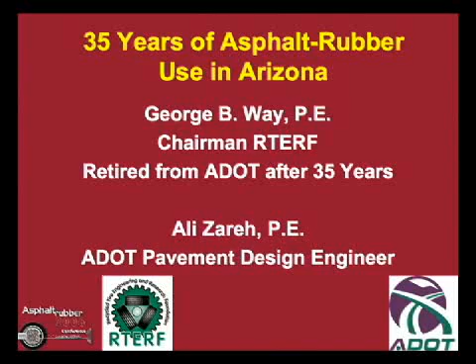Thank you all. Yes, indeed, I do have all those years of experience, and I also have an excellent plastic surgeon, by the way, who spends a lot of time on me.

I'd like to recognize my co-author, Ali Zareh. Ali, please stand up. He's with the Arizona Department of Transportation and provided a lot of the background material you see here. I was previously with the Arizona Department of Transportation for about 35 years, and it's a great state. Maybe not quite as great as California because we don't have an ocean, but who knows? Stay tuned. You never can tell.

I wanted to make a little comment about this morning's presentation. My good friend and partner, George Souza, talked about his four very beautiful assistants, Katia, Carla, Susanna, and Rosanna. Boy, those are nice names, aren't they? But I want to mention that they are all engineers, all civil engineers, and I know they're very good at their job. So I thought it would be nice to recognize them. I don't know if they're in the audience or not, because it's not an easy thing for a woman to be an engineer. It's not easy for a man to be an engineer, to be perfectly honest, but whether they're here or not, I think you should give them a little applause, because I think that's quite a great accomplishment.

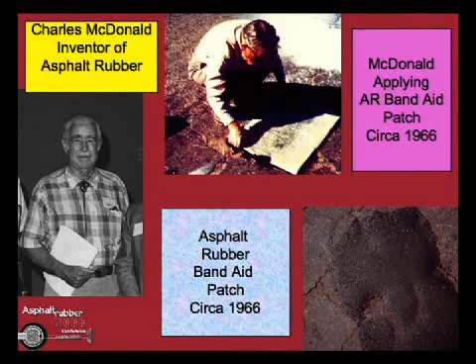You've already heard a lot about this man, Charles McDonald, and I had the good pleasure of knowing Charlie. He's long gone now, too bad. He was a real pioneer, a real true pioneer. And it's true, he did develop this material just to fix up the roadways in the Phoenix area, just temporarily. Back in those days, middle 60s, roads in Phoenix were really not in too good a shape. And thanks to him, a lot of roads in Arizona are in very good shape today. So sometimes one person can make a difference.

Oftentimes nowadays we do things by committees. We have to have 47 committees do everything, but sometimes it just takes one person to make a big change in the world. And I applaud Charlie McDonald for doing that and having the perseverance and personality to do it as well. Charlie always had a smile on his face. He was always in a good mood. Even when people were asking him lots of questions and saying things couldn't work, it didn't seem to bother him.

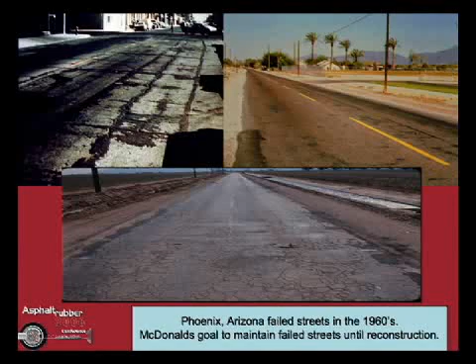He seemed to believe they would work in the long run, and sometimes that's what you have to have. You have to have that knowledge in your own mind that something is going to work and just keep on going. And that's the way my colleague George Souza is. George doesn't smile as much as Charlie did, but I tell you, he does have that enthusiasm to get things done and to keep going. He doesn't give up. He didn't give up on this conference, and I know for a fact he could have given up many, many times, but he didn't. So, like I say, just one person can make quite a difference in the world.

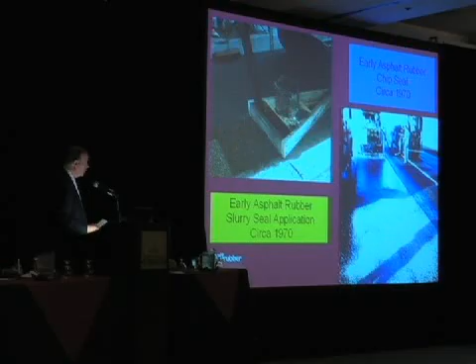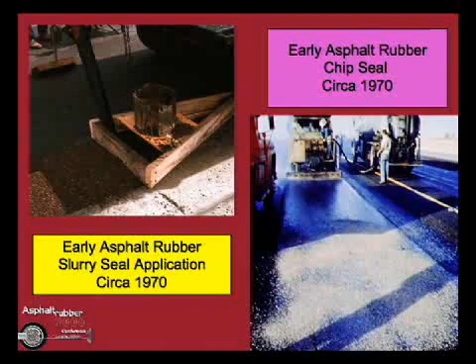In the early days, things were pretty primitive. Equipment was very primitive. It was kind of like, make it in your backyard and see what happens. And there were a lot of failures, a few successes, but a lot of failures in the early going. Eventually, they got better at what they were doing, not a lot better, but a little better. And even though in those days they did a lot of manual labor as far as getting the rubber into the trucks in order to spray the rubber, nevertheless, it was progress, and again, some good things happened along the way. So what happened along the way?

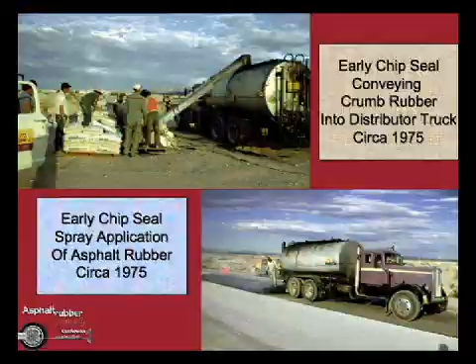Well, for one thing, they came up with a seal coat process, which was called a SAM, stress-absorbing membrane. And the thing about asphalt rubber is because of its high viscosity at high temperature, you can put down a very thick layer of this material before you put the chips down. And we found that would prevent the reflective cracks very well.

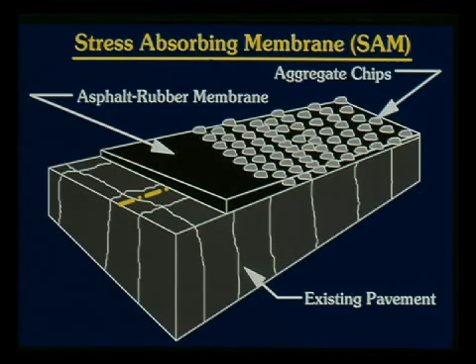This was the first really practical application of this material, and it came about in the early 1970s. To get to this point, they had to burn up a few dump trucks along the way, but they eventually got to it. Then later, through additional research, they found that an interlayer, a stress-absorbing membrane interlayer, would also work very well.

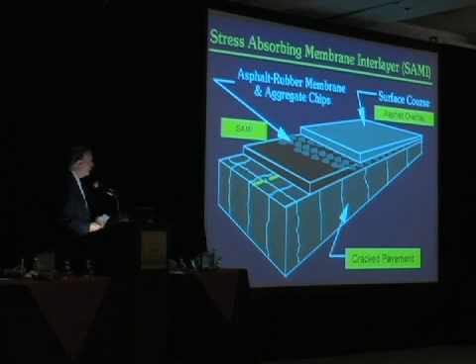Many of the early projects in Arizona were this type of construction. They were a 2-phase type construction: place a seal coat, and then place an overlay on top of it. This is still a very good process. It's not terribly popular in Arizona today, primarily because we'd like to do everything in one process. We'd like to avoid having to do things twice, simply because we have a lot of traffic in Arizona, just like you have an enormous amount of traffic in California.

For those of you who hadn't noticed, drive around California for a while and you'll notice—I used to say everybody in California owned 2 cars and they drove them at exactly the same time, which is really amazing, but I think it's true. There's a lot of vehicles. The only place I found more vehicles than California is China. And that's an amazing place, too. I know George eventually will talk about that.

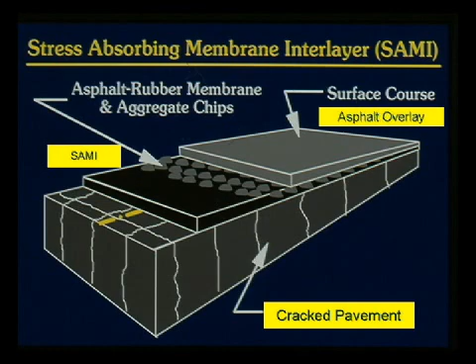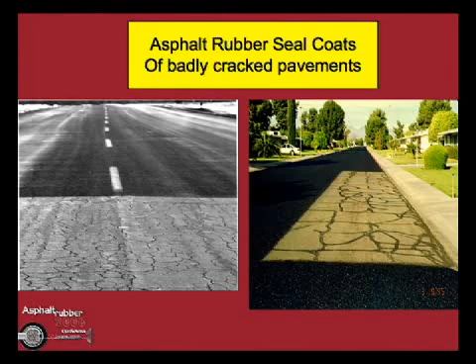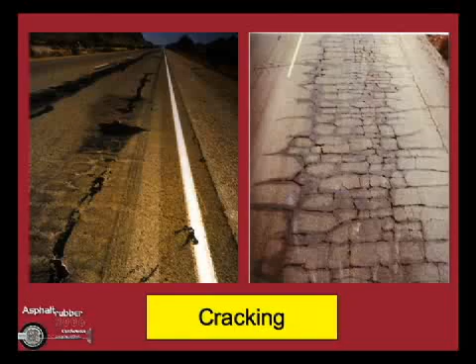Some of the early seal coat jobs were focused on really, really badly cracked highways. They were seal coating them as a temporary action, only to last a year or two until they got around to overlaying them. The way funding went in Arizona, sometimes that would take more like 5, 6, 8, or 10 years. So we learned a lot from these early seal coat jobs about the ability of asphalt rubber to retard reflective cracking. Cracking, indeed, is why this material was eventually adopted in Arizona—to prevent reflective cracks. In other words, when you overlaid a pavement of this bad a nature, you could prevent the cracks, or at least delay them for a very long time from coming through.

Raveling is another issue. Fortunately, we don't see much of this in Arizona anymore, but many years ago the Federal Highway Administration, wisely I think, promoted the use of open graded friction courses as a means of getting safer highways. A lot of states tried this; Arizona and California had used them for many years. But one of the problems with open graded friction courses is that they do tend to ravel. The reason for that is because you can't really put too much asphalt into an open graded friction course—at least not if you use regular asphalt, because it all runs off and then you have a bleeding situation. So you're always between either raveling or bleeding. You'll see later that the adoption of asphalt rubber for open graded friction courses has really prevented this from occurring.

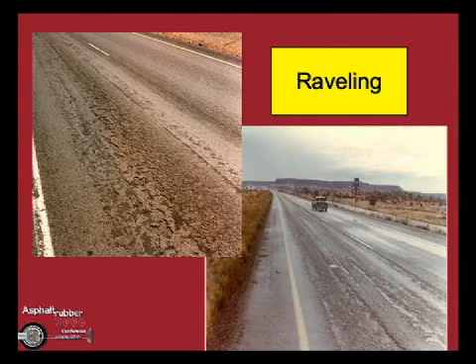Arizona is not just Phoenix, Arizona, although we always think of it that way as a desert. About half of our state is actually mountainous. It has snow, ice, cold weather. People have to chain up their vehicles to get up to Flagstaff, Arizona, or Show Low, and sometimes we even have to shut down the highway because there's so much snow. I know you won't believe me, but it is the truth, and it is very well documented.

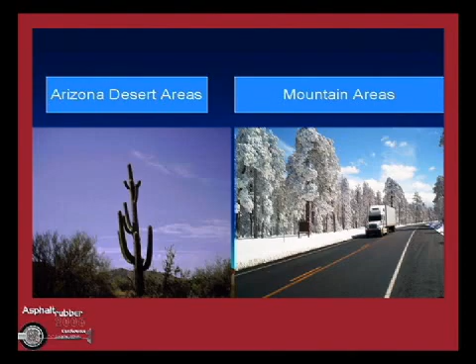Let's talk a little bit about the product that we use in Arizona, which is not terribly different than California's, but a little different. First of all, we just use crumb rubber made from waste tires, and those are usually U.S. passenger tires. Arizona generates roughly 5 million tires a year, thereabouts, and that's a lot of crumb rubber. So there's an ample supply of it.

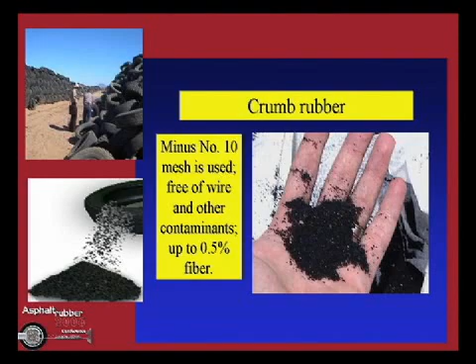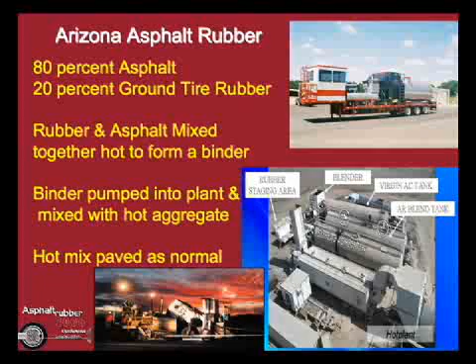It's roughly about 20% ground tire rubber and 80% asphalt. Normally in Arizona, we use about 1 or 2 grades softer asphalt than would be normally used for the PG grading. So in Phoenix, the PG grade is about a 70-10 or 76-10 or 76-16. We use a 64-16 for the base asphalt for asphalt rubber in Phoenix.

In Flagstaff, which is typically a high cold temperature area, we use about a 58-22. Those work very well as the base asphalts. When you add the rubber to it, it becomes a somewhat stiffer asphalt at high temperatures, which is good for preventing rutting, and it also gives you some good cold temperature properties as well.

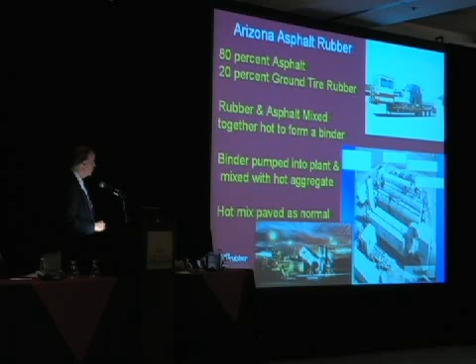The mixing is a little bit complicated, but not too complicated. A little bit of piping, a little bit of plumbing, a little bit of pumping, and a whole lot of heat. And then eventually you can pave with a normal paving operation.

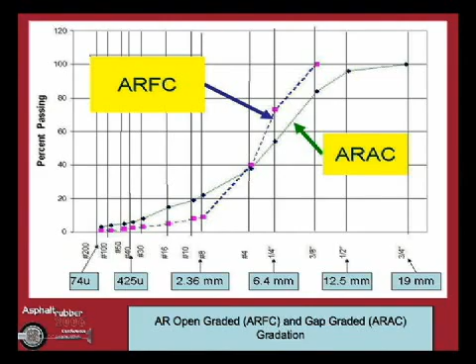These are the gradations of the open graded and what we call gap graded or coarse graded material. You'll notice the gradation here if I can get this pointer to work.

You notice this grading here, which is the gap graded or coarse graded, very much like an SMA type gradation. You can see the 2.36 or number 8's down around 20-some percent, like an SMA, just without very high 200s. The open graded is pretty much a one-size chip. You'll see a picture of that a little later on.

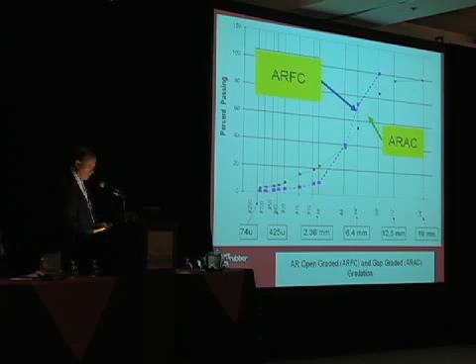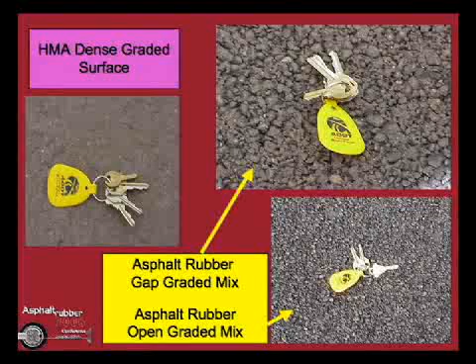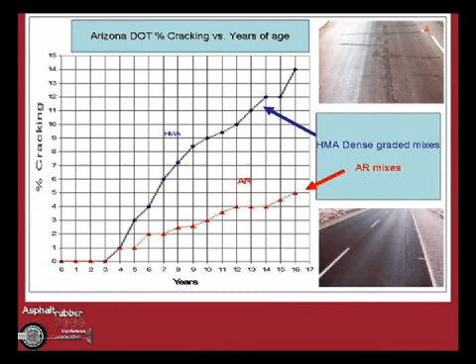You don't see much in the way of fatigue cracking, just a little. This is an example project we did in Flagstaff back in 1990 - an old, badly cracked up concrete pavement. We overlaid it with asphalt rubber, and after a number of years, it performed very well.

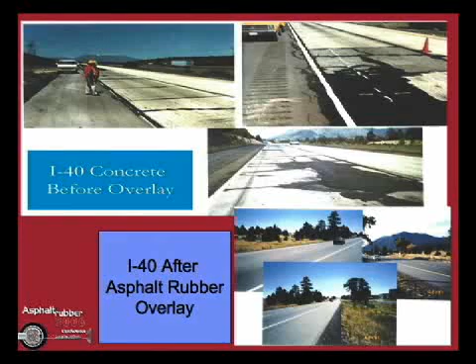This is an example test section from that same project. You can see here we had 100 millimeters, or a 4-inch overlay, over that concrete. After 8 years of service, it was very badly cracked. Here we had half the thickness, only 50 millimeters of the asphalt rubber mix, and very few cracks after that same period of time - same roadway, same environment. This is in the mountains, so it does get snow in the wintertime.

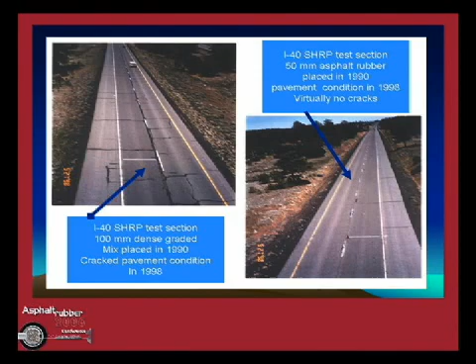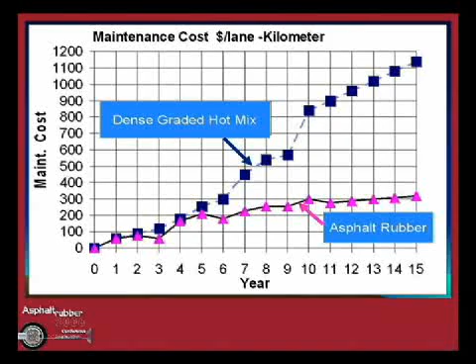Maintenance costs are another reason why we've seen this material used widely in Arizona. In other states, it's much less than conventional mixes, and again this is due to the fact that there's just much less cracking to have to maintain.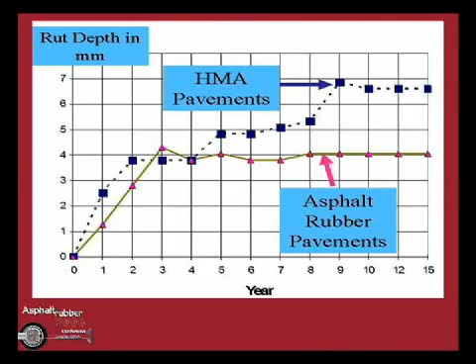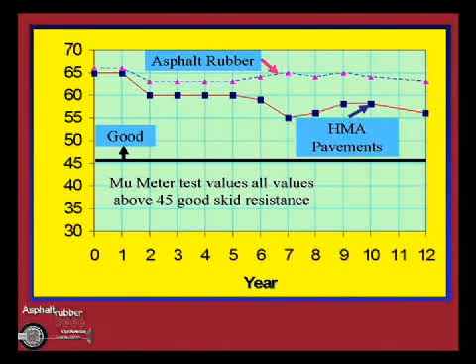Rut depth is pretty good, it doesn't rut to a great degree, and that's again because you have a lot of stone-to-stone contact. Skid numbers, mu-meter numbers, are also quite good, normally because of that surface course texture - the material is a good texture, a good drainage layer. With dense graded, you have to come back and do maintenance, and oftentimes that means putting more oil on the roadway.

Smoothness has been very good over the years. This is inches per mile, which many of you in the audience are probably more familiar with than millimeters per kilometer. You can see that oftentimes in Arizona we have projects that start somewhere around 40 inches per mile by IRI, or even sometimes even less, and the rubber sections do quite well over time.

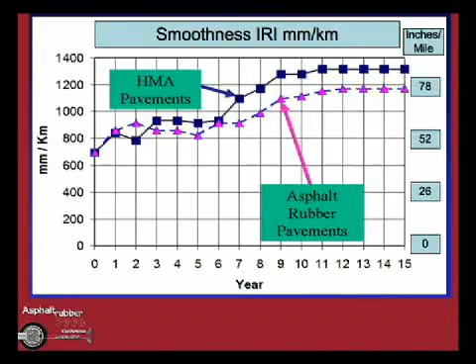Splash and spray is something that was talked about in this morning's session with regard to safety. The people in Texas have done some work on this, as have the people in California. I believe there is a report available in your black packet that describes the work in Texas with regard to reducing spray and reducing accidents. Recently, California Highway Patrol published a similar study, where they found a similar reduction in accidents. And why is that? Well, it's because the splash and spray is reduced, and that's better visibility.

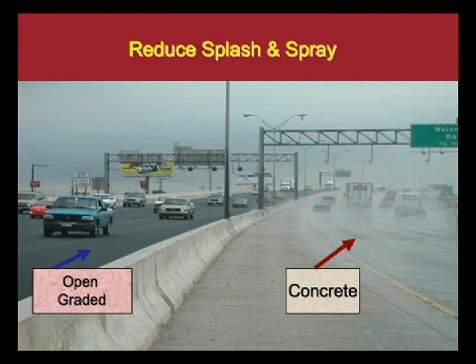And we have a video of that. If I'm real lucky, this video is going to work for one minute. So we're going to find out. This is the acid test. We'll see what happens. Go right after this stuff.

This is a road in Texas, and these are people with the Texas DOT, and they're videoing and following a truck. This is on a dense surface of asphaltic concrete. They're going to come up to a section that has an open graded surface, and when that happens, you'll see it's quite dramatic. What he's trying to do now is catch up to that truck, so he's in that spray envelope. This is the sort of thing you would encounter in a lot of states in the U.S. Probably have a little more rain than Arizona, but certainly California and certainly many of the states back east or even in Texas.

This is perfect. One of the problems here is it's hard to see the vehicles ahead. Sight distance is not good. And of course you're having to deal with that spray all the time. And of course the road is slick, which is not a good thing.

So they come off of this bridge now, and they're going to go on to the open graded surface. I think they actually call this a porous surface there rather than open graded. You can see how dramatic. Remember, same rainstorm, same traffic, same truck. Quite the change. In their studies in San Antonio, where they placed an open graded friction course with rubber on top of concrete, they saw a dramatic reduction in accidents, I think on the order of 50%. And in fact, many lives were saved. I don't know the exact number, but several fatalities were saved as well.

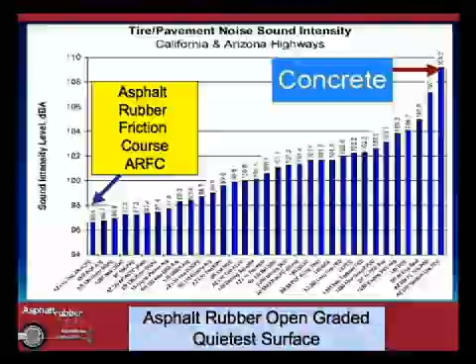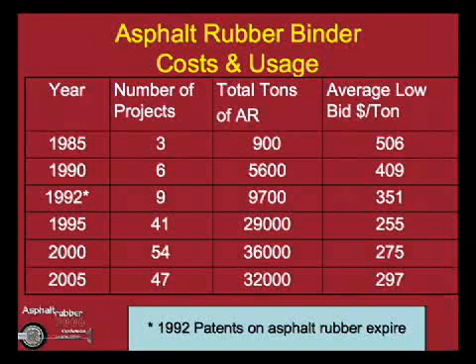A little bit about costs and usage. You can see here that when the patents came off in 1992, the cost of a ton of binder. Arizona is a little bit unique. We bid the binder tonnage separately from the mix, for that matter. So most states combine the two, so you don't really know how much binder costs. But you can see here the cost per ton has gone up a little bit. In fact, in 2006, it went way up, even higher than this, because the price of gasoline went up, and asphalt is sort of a byproduct of that. So that number, 297, was considerably higher in the spring of this year. It's probably beginning to fall back down to earth now.

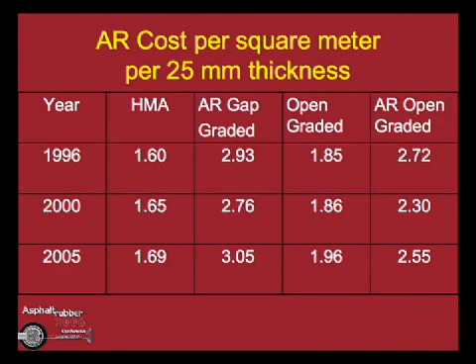This is a cost per square yard, or in this case, square meter per 25 millimeter thickness, which is like square yard per inch. You can see it's a relatively expensive material. But on the other hand, it's typically placed in less thickness. As an example, in Arizona, the typical thickness of dense graded is approximately 5.5 inches, and the thickness of the gap graded is about 1.7 inches on average.

Somebody give me some water there? A little bit of water. I want to go dry here. The air here is very dry, too, for that matter. They should really do something about that.

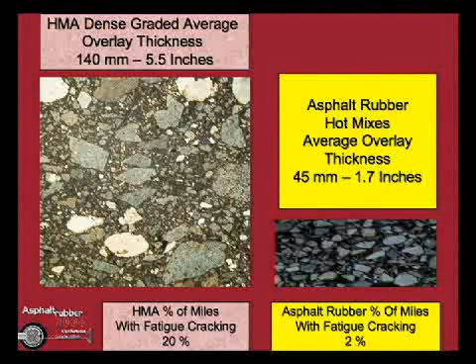Notice also at the bottom the fatigue cracking. Dense graded mixes that we've seen over a number of years have like 20% fatigue cracking, and we've only seen about 2% fatigue cracking over all these years with asphalt rubber.

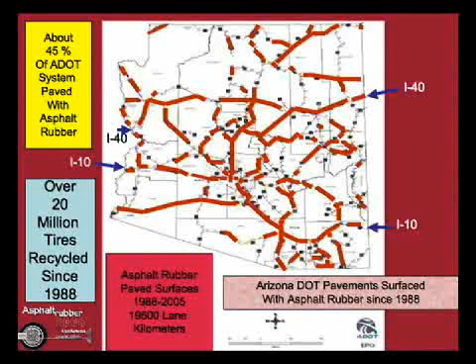It's a little bit hard to see, I know, but the point here is it's kind of a ghost or shadowy type figure here, but all those red things are roads covered with asphalt rubber in Arizona, in the Arizona DOT system since 1988. Roughly about 20,000 lane kilometers. That's used about 20 million tires, and about 45% of the ADOT system has been paved with asphalt rubber mixes.

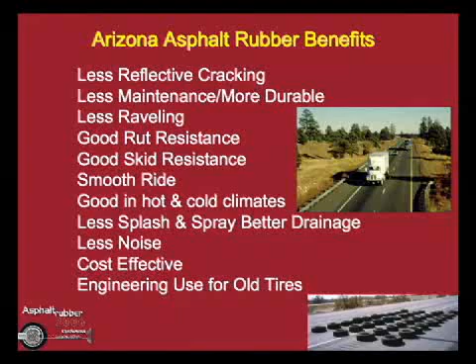Just to recap the benefits, you've seen these already. Doesn't hurt to see them again. Less reflective cracking, more durable maintenance, less raveling, good skid resistance, smooth ride, good in hot and cold climates, less splash and spray, less noise, good engineering use of old tires, and cost effective.

And, you know, we've come a long way. I think Charlie McDonald would be very, very happy and pleased to see how far we've come. So with that, I'll let you ask all those dangerous questions. Thank you.

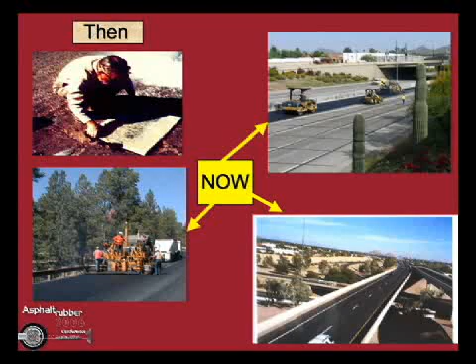There's one back here. George, in your last slide, you mentioned that one of the advantages of asphalt rubber is less rutting. Is it because of the aggregate structure or because of the binder?

Probably both, but I think probably more so the aggregate structure. Another colleague of mine, Dr. Kaloush, has done some testing with these mixes using the SHRP test, I guess they used to be called the simple performance tests. Maybe they're not so simple. I don't know what new name they're coming up with. But it turned out that if you did not confine these materials, they didn't look very good in rutting.

Okay? But if you did confine them in the laboratory, they had tremendously high rut resistance. In fact, and I know Dr. Kaloush could correct me, but I think one of the mixes was as high as he's ever tested of any mixes anywhere in the U.S. And I know ASU, Dr. Witczak, and Kamil have tested a lot of mixes with the SHRP, or Superpave, or the simple performance test protocols.

And so this material, when it's confined in a thin layer, with lots of aggregate-to-aggregate, rock-to-rock contact, has excellent rut resistance. And in fact, you know, we've seen like 100 miles or so of concrete freeways overlaid with 1 inch of the open graded mix. You really don't see any rutting in that material at all. I mean, there's virtually no rutting of any kind.